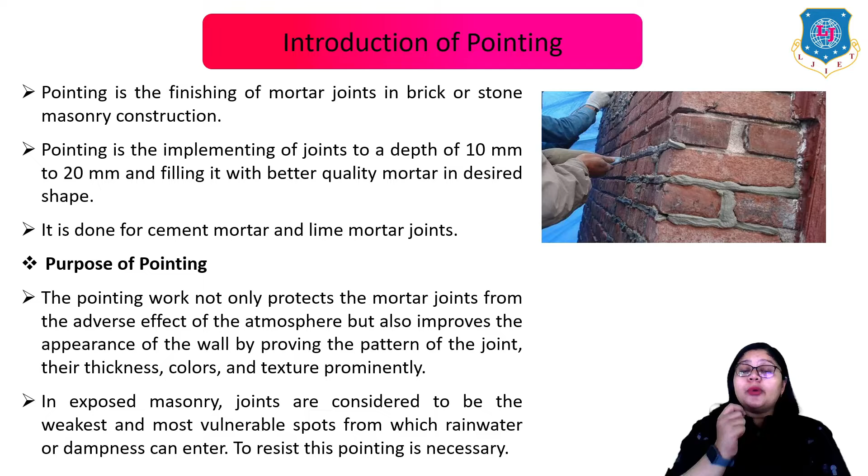Now what is the concept of mortar for this particular pointing work? Pointing work is usually done by lime mortar or cement mortar. When I talk about lime mortar, which is 1:2, it means one portion of fat lime and 2 times the sand or surkhi we use. When I talk about cement mortar, which is 1:3, it means one portion of cement and 3 times the sand we mix together.

So the mortar for lime pointing is made with fat lime by grinding it with the sand or surkhi in a mortar mill.

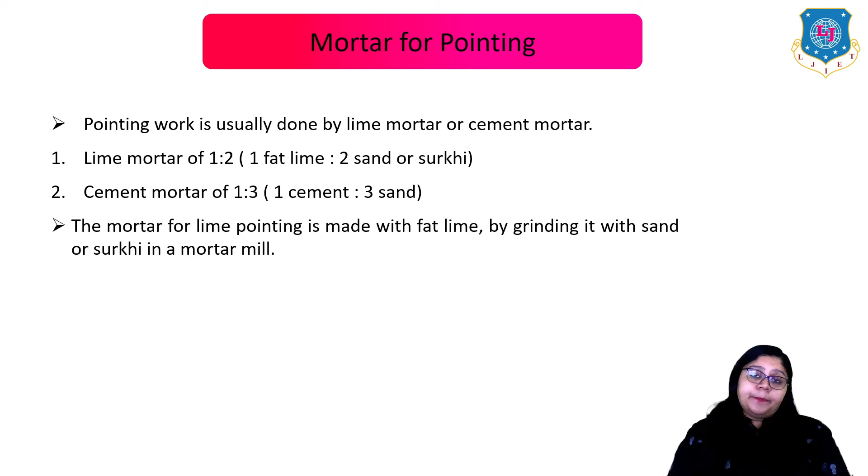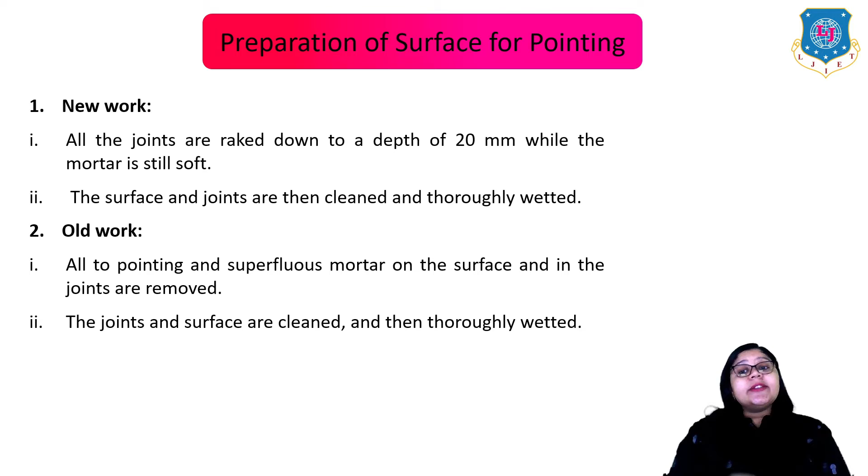Now let me give you an idea about the preparation of surface for pointing. For new work, all joints are raked down to a depth of 20 mm while the mortar is still soft, and the surface and joints are then cleaned and thoroughly wetted. For old work, all the old pointing and superfluous mortar on the surface and in the joints are removed. The joints and surface are cleaned and then thoroughly wetted. So that is how we prepare for pointing.

Now what are the methods of pointing? After preparing the surface as mentioned above, the mortar is carefully placed in joints using a small trowel. The placed mortar should be of the desired shape. Whenever fresh mortar is placed in the joints, it should be pressed hard to gain a strong bond with the old interior mortar. The pointed surface is kept wet for at least a week or till it sets after application.

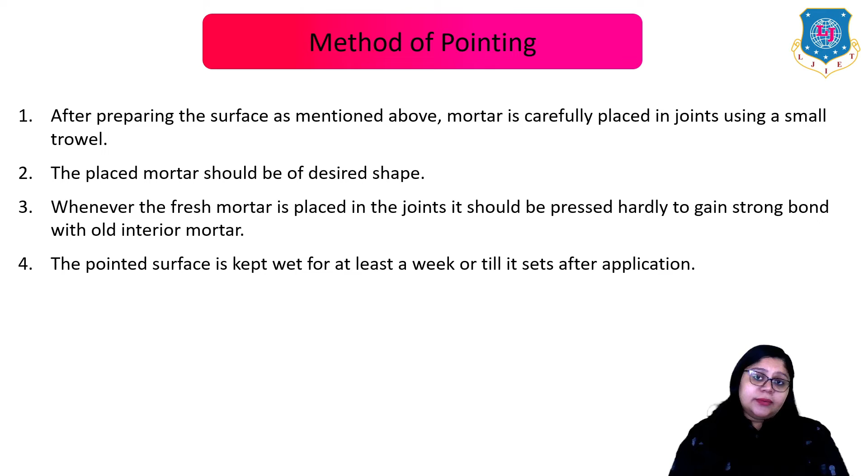Now let me give you an idea about the different types of pointing. The first type is flush pointing, then recessed pointing, the third one is rubbed, keyed or groove pointing, the fourth one is beaded pointing, the fifth is struck pointing, the sixth is tuck pointing, the seventh is V pointing, and lastly weathered pointing. Let us understand all these types in detail.

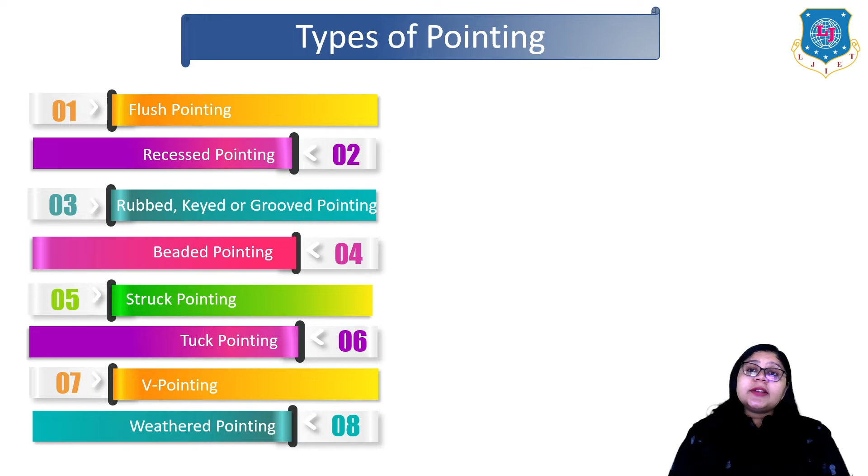Let us start with flush pointing. In this type, mortar is pressed hard in the raked joint and finished off flush with the edges of the masonry units. The edges are neatly trimmed with trowel and straight edges. It does not give a good appearance, but flush pointing is more durable because it resists the provision of space for dust and water. Due to this reason, this method is extensively used. Here you can get a clear idea of flush pointing from this image.

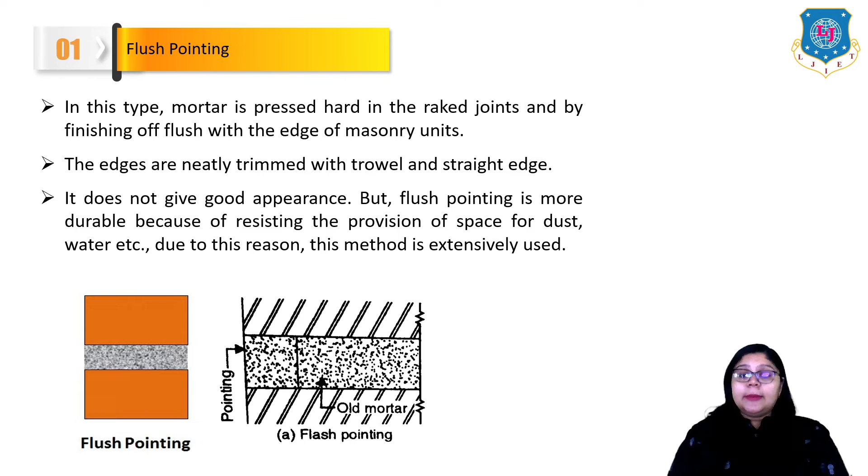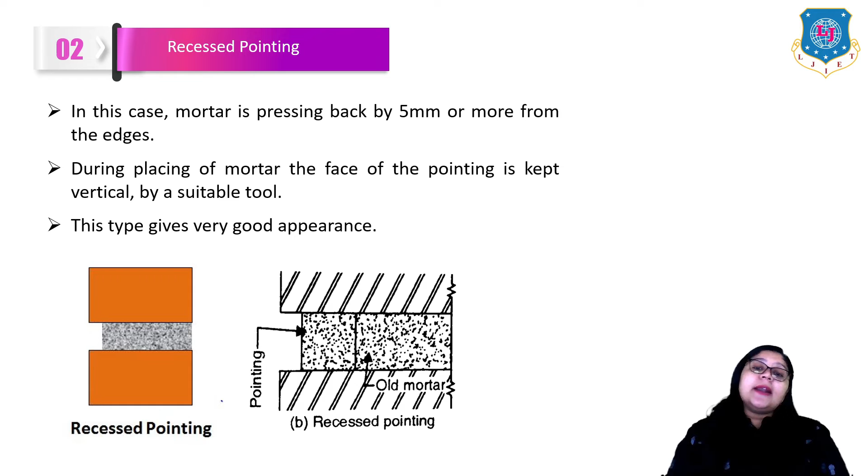Now let us move to the second type, recessed pointing. Here mortar is pressed back by 5 mm or more from the edges. During placing of mortar, the face of pointing is kept vertical using a suitable tool. This type gives a very good appearance. Here you can get a clear idea of recessed pointing from this image.

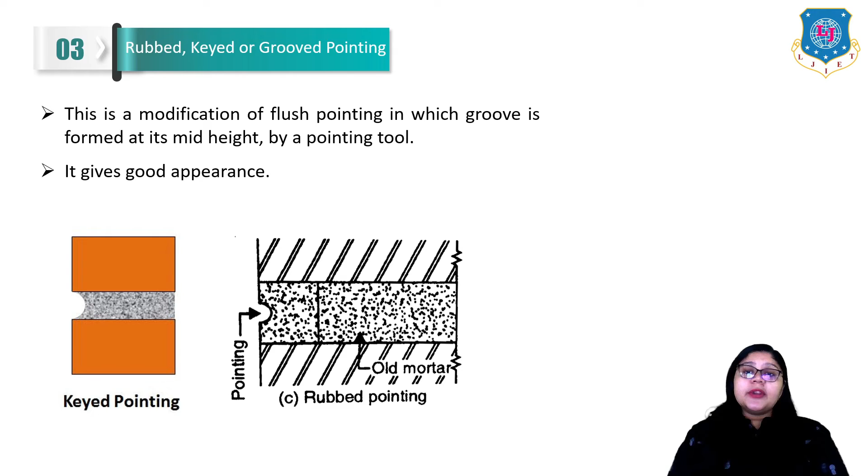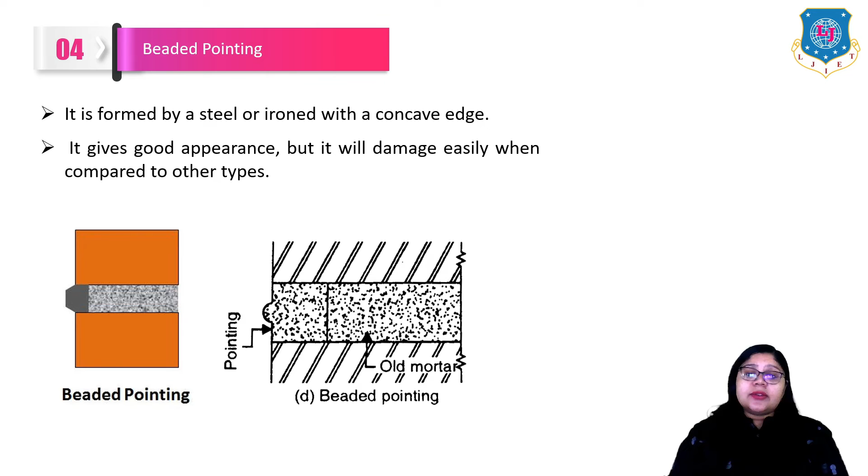Now the fourth one, beaded pointing. Here it is formed by a steel or iron tool with a concave edge. It gives good appearance, but it will damage easily compared to other types because it is the exposed one. That is how this beaded pointing construction looks from this image.

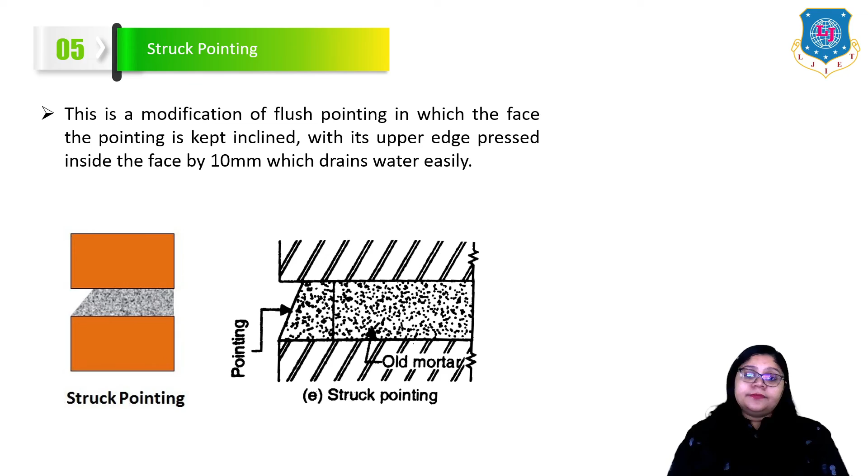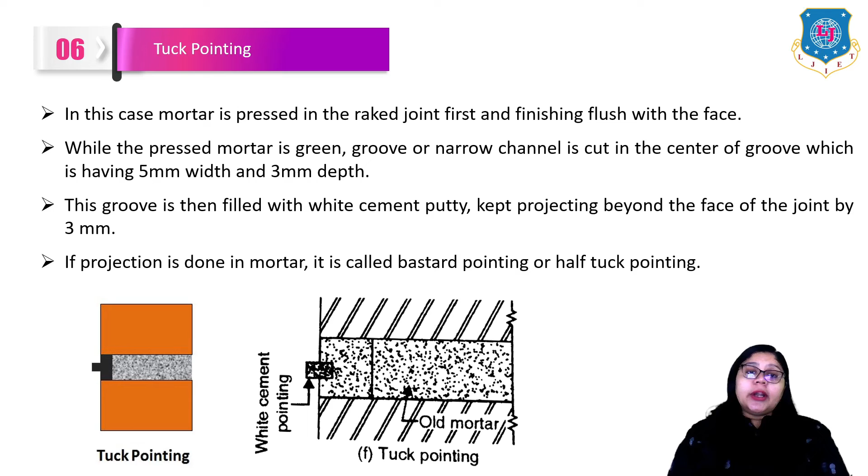Now let us move to the sixth one, tuck pointing. In this case, mortar is pressed in the raked joint first and finished flush with the face. While the pressed mortar is green, a groove or narrow channel is cut in the center, having 5 mm width and 3 mm depth. This groove is then filled with white cement putty, kept projecting beyond the face of the joint by 3 mm. If the projection is done in mortar instead, it is called bastard pointing or half tuck pointing, as shown in this figure.

Now the seventh one is V pointing. V pointing is similar to the keyed pointing work. The mortar is filled and pressed in a joint. After that, the V-shaped groove is formed in the joint using a V-shaped tool, as shown in this figure.